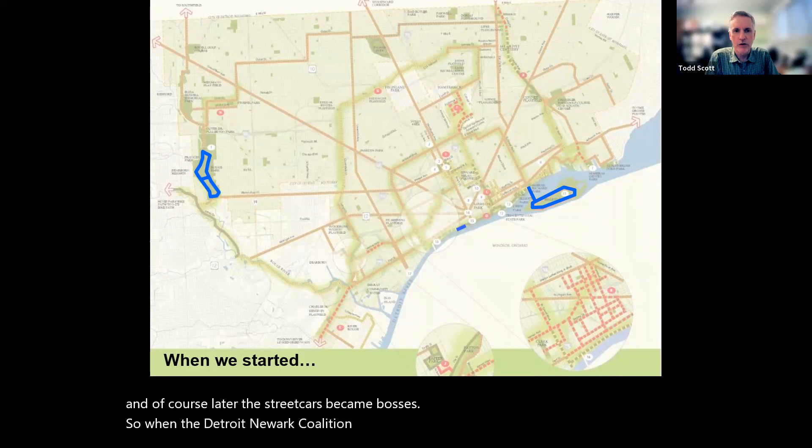So when the Detroit Greenways Coalition began, there weren't many non-motorized pathways in the city of Detroit. The roads were largely built for cars only. There were some bike lanes on Belle Isle, some trails at some of the parks, and a little bit of Detroit riverfront built down by the Joe Louis Arena. But where we are today, we're starting to see a much bigger network of biking infrastructure.

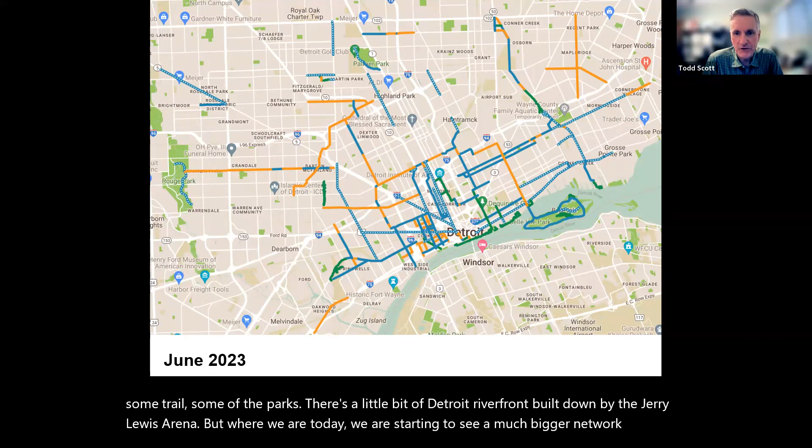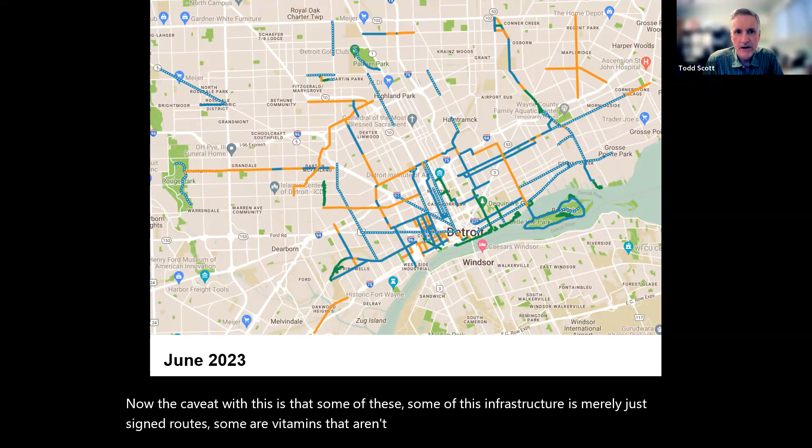Now, the caveat with this is that some of this infrastructure is merely signed routes. Some are bike lanes that aren't well maintained or separated from traffic as well as they could be. The lines with dots are protected bike lanes, but sometimes we still have cars parking in them, and they're not well maintained. So the state of Detroit bike infrastructure is ever changing, and we're constantly evolving toward better designs to address these issues.

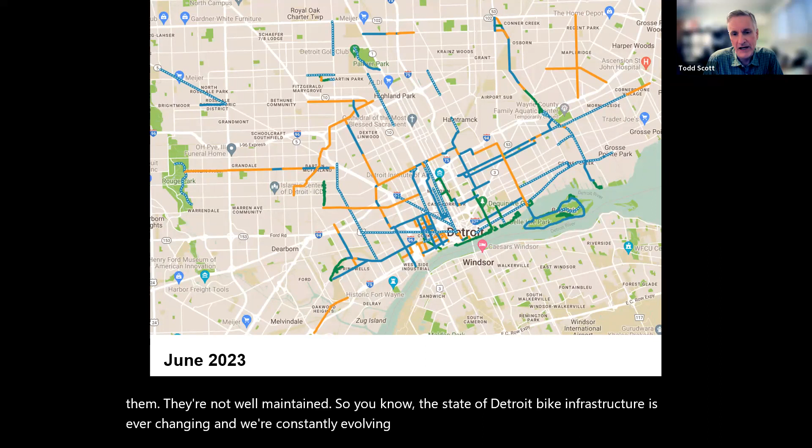Sometimes it's important just to get out there and claim your space on the road first, and then find the funding to go back and make improvements to those pathways.

The next step has been moving to protected bike lanes. These are the bike lanes on Cass Avenue. Unfortunately, they don't look as clean and as beautiful as they do in these photos—they need to be updated—but this was a major push from the city to get these put in. And now these have become kind of the standard for all projects in the city.

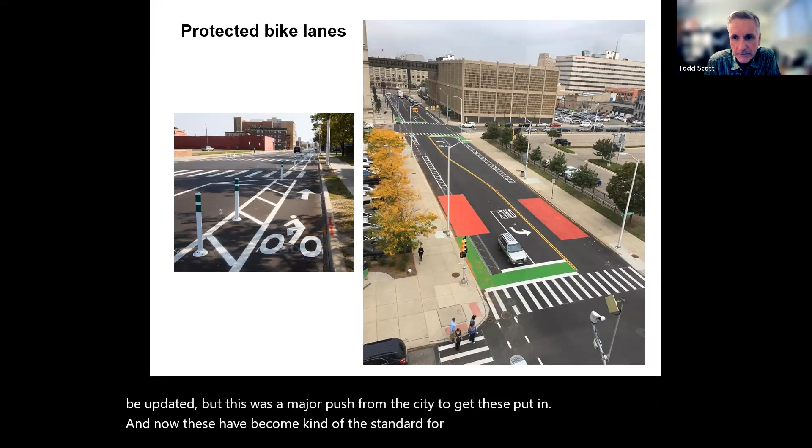One reason we've been successful in advocating for these is that we've taken a data-driven approach, and Mayor Duggan is very much into data. He doesn't want to hear the emotional arguments of why these bike lanes are beneficial or why they're killing the city of Detroit. He wants to see the data.

So in this example I'm showing here, bike lanes got put in on Jefferson. We have some bike counters—I installed them in the bike lanes, both on the far east side and also near Belle Isle. We counted 154 bikes per day just weeks after the bike lanes were installed, and closer to Belle Isle we counted 373 bikes per day. So we gave this information to the mayor, and it shows that people are using them. If you build it, they will use it.

It also shows that when people like Keith Crain from Crain's Detroit publish an op-ed saying no one's using the bike lanes, the mayor can say, you're wrong, and these are actually the numbers we're seeing. So that really helps state the case for these bike lanes.

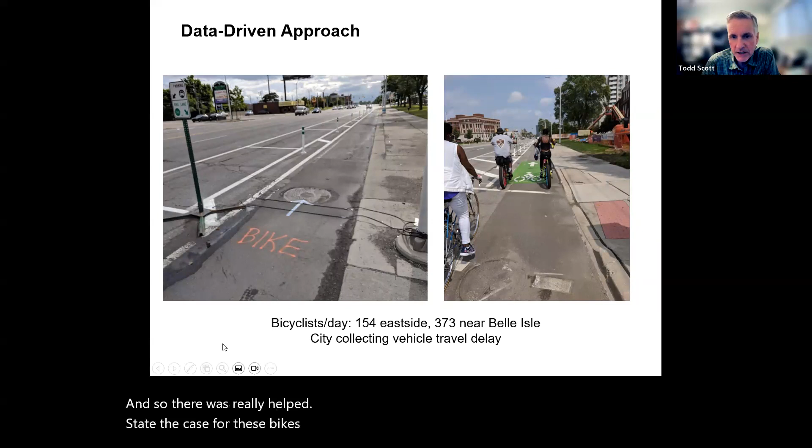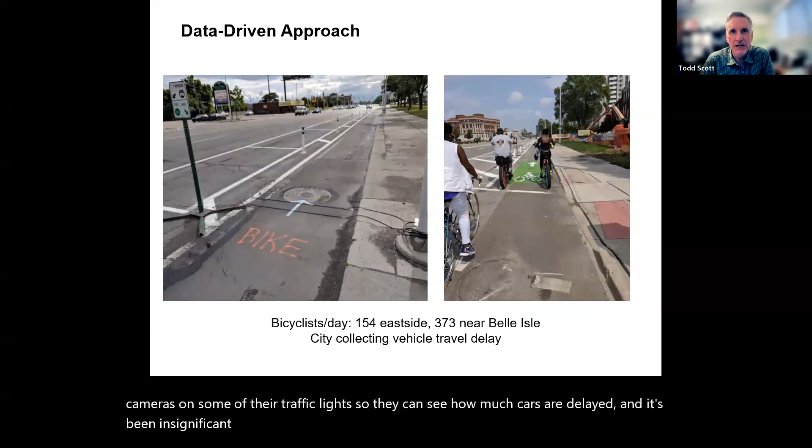The city's also collecting vehicle delay data. They have cameras on some of their traffic lights so they can see how much cars are delayed, and it's been insignificant. But motorist perception is that it's causing a major issue. The underlying issue is that for 100 years they've had their way, and now they're not, and they're unable to speed as much when the lanes are taken away like this, which causes them to be frustrated. But the data shows that this is actually a benefit.

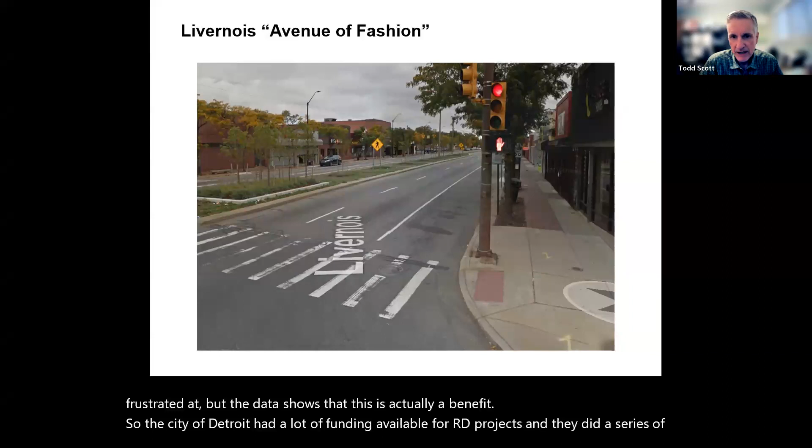So the city of Detroit had a lot of funding available for road projects, and they did a series of streetscapes around the city. Perhaps the one that was most successful was Livernois, Avenue of Fashion, between 7 Mile and 8 Mile. This is how it looked before, pre-COVID. You can see how narrow those sidewalks are—that is not a sidewalk you want to be on during the pandemic—and there was no opportunity for outdoor sales or outdoor cafes.

Besides, the average speed on the street was 40 miles per hour. The speed limit was only 30, and there were cars going substantially higher, 60 and 70 miles per hour. It's just not a street where you would want to hang out.

With the streetscape project, the road was substantially narrowed. The sidewalks were widened so businesses could expand a bit and have more of an outdoor presence. We had bike lanes at sidewalk level, which, although there were more conflicts perhaps with pedestrians, reduced the need for maintenance. Road debris no longer collected in the bike lanes with this design.

We also had MoGo public bike share expand into this area, as well as some southeast Oakland County communities, which you can think of as transit for the first and last mile of public transit. You can get off the bus, grab one of these bikes, and get to your final destination. It's been beneficial for MoGo to expand into these areas and offer reduced rates for those on state assistance, which helps make it easier for everyone in Detroit to get a bike.

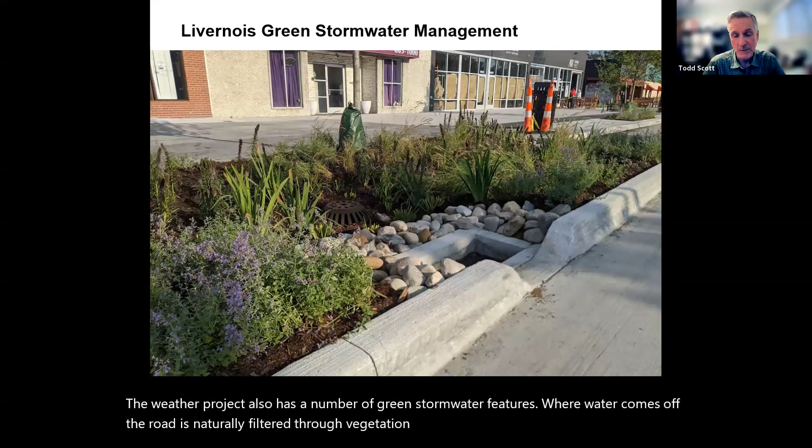The streetscape project also has a number of green stormwater features, where water coming off the road is naturally filtered through vegetation. In case of substantial rain downfall, the water goes into the sewage system, but otherwise, for lighter rain, it just gets collected in these green stormwater features.

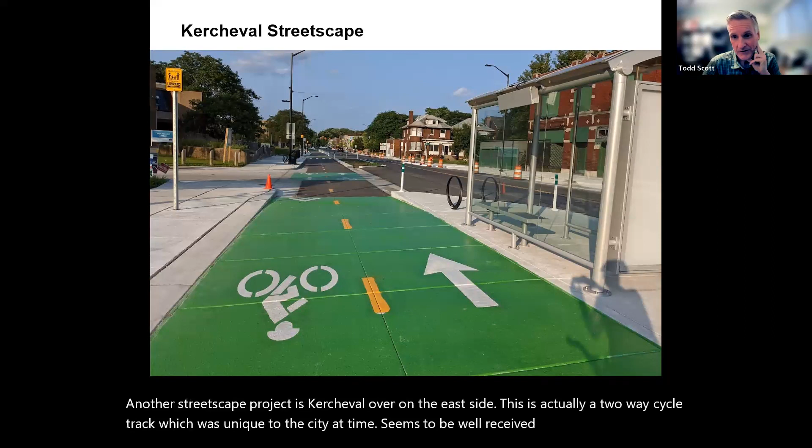Another streetscape project is Kercheval on the east side. This is actually a two-way cycle track, which was unique to the city at the time. It seems to be well received, and folks tend to like it. It has what's called a floating bus stop, where the bus stop is moved closer to the street where the buses would be, so buses don't have to pull into the bike lanes.

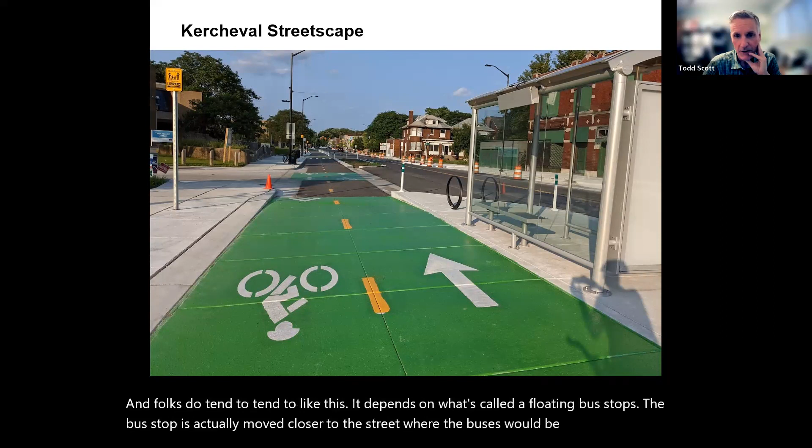This is a design that a lot of people really seem to like. There's also maybe less debris, or at least more opportunity for bicycles to go around debris if it's at the curb. West McNichols has a similar design.

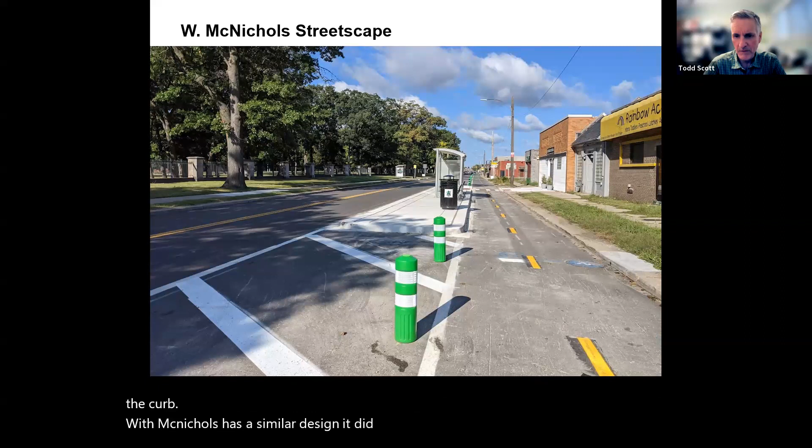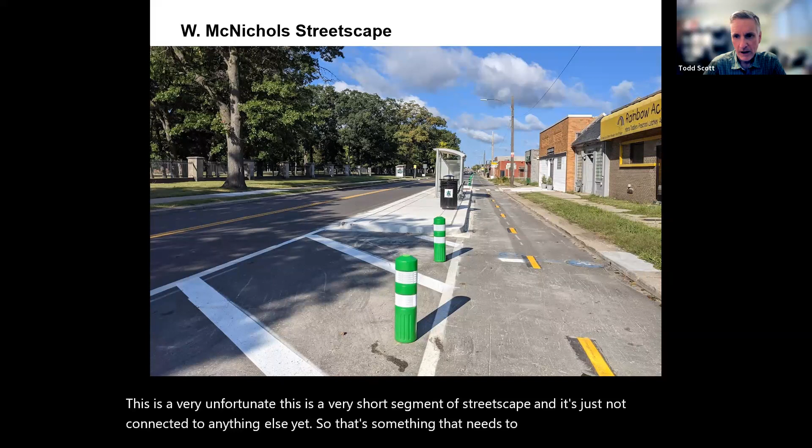It did pilot these new green delineators, which are plastic and don't look as nice as they do in this photo. Unfortunately, this is a very short segment of streetscape, and it's just not connected to anything else yet, so that's something that needs to happen. Without being connected to other things, you don't get as much ridership as you'd like.

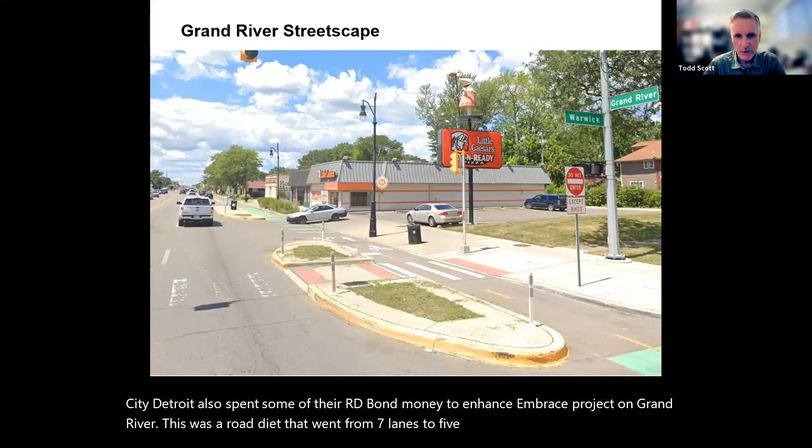The City of Detroit also spent some of their road bond money to enhance MDOT's project on Grand River. This was a road diet that went from 7 lanes to 5 with a two-way cycle track. It did lose some parking, so it was a little bit controversial, but they lost parking on the side of the street where it wasn't needed as much. There are still issues with cars parking in the bike lane, and it's been difficult to stop that from happening.

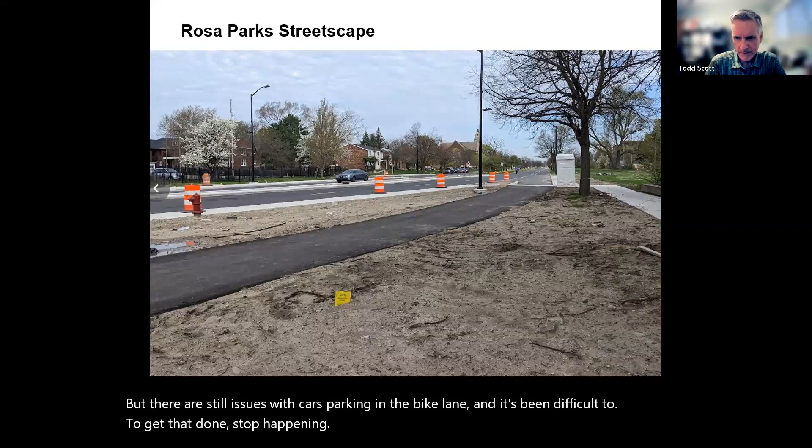Another streetscape still under construction is Rosa Parks. There used to be 5 or 6 lanes one way going northbound - substantially more lanes than the Lodge Expressway, which was ridiculous. Detroit has reduced those lanes, removed pavement, which is a great way to reduce stormwater runoff, and added that space, which used to be car lanes, to the nearby park to expand it, along with a pathway for bicyclists to travel through the park and connect up with the new bike lanes on the north side.

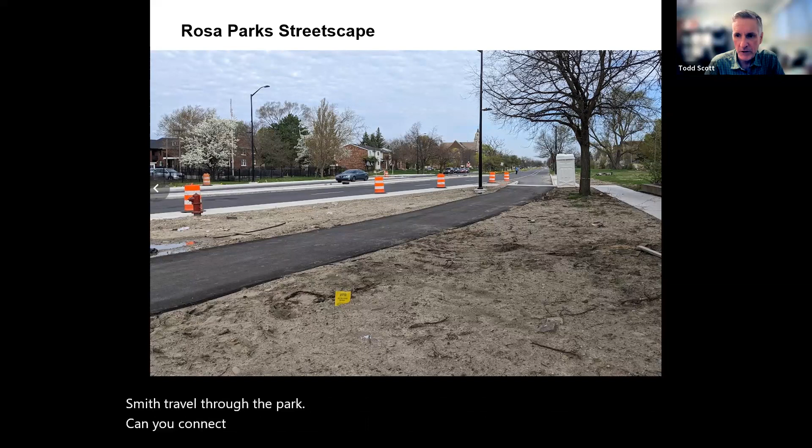East Warren streetscape is also getting enhanced protected bike lanes. This is a picture from last year - it's further along than this now.

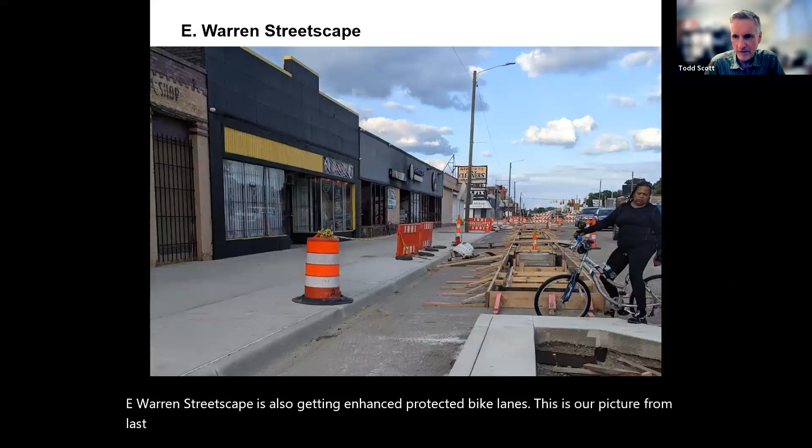And this is the Dexter streetscape, which I'm not sure will start construction this year. I believe it will start this year, but I don't think the contracts have gone before City Council yet.

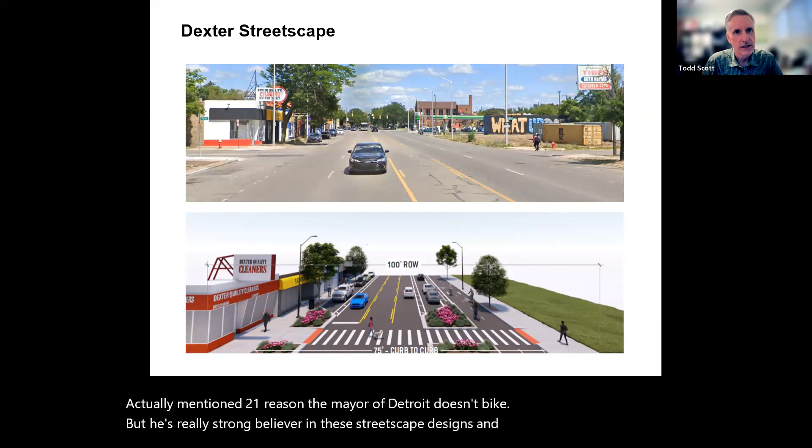I should mention too - one reason the mayor of Detroit doesn't bike, but he's really a strong believer in these streetscape designs, is that the former transportation commissioner for New York City, Janette Sadik-Khan, once gave a presentation to the mayor.

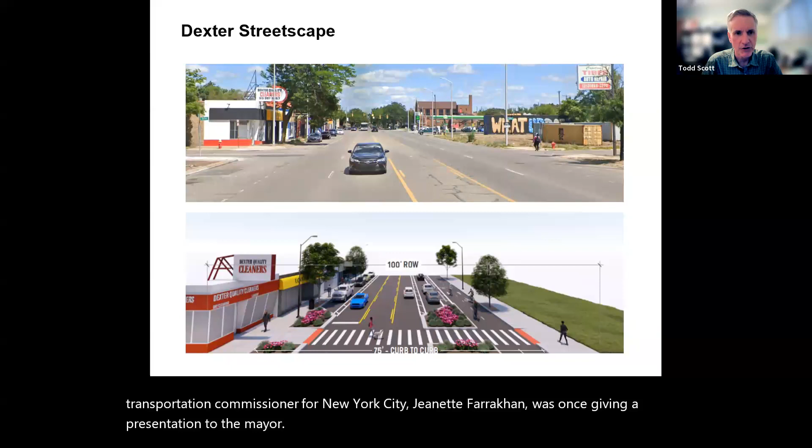She was part of Bloomberg Associates and gave a presentation on her work in New York City adding protected bike lanes and road diets, among other projects.

Immediately into her presentation, the mayor stopped her and said, 'I was just in New York City. I walk out of my hotel. You took away a lane of traffic to add bike lanes and the cars were backed up. Why did you do that?'

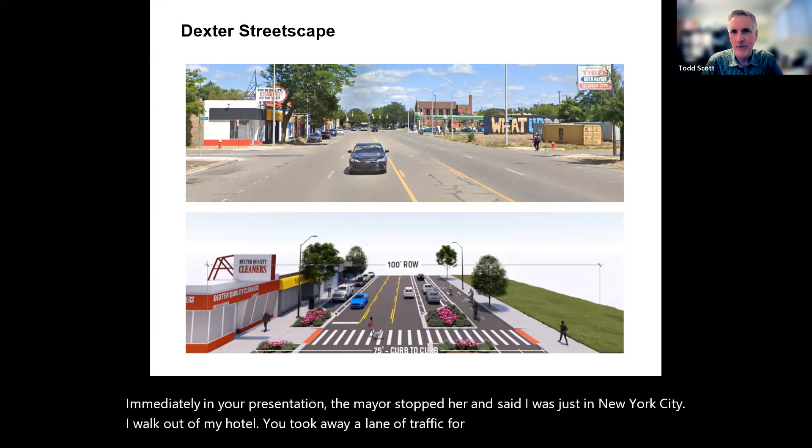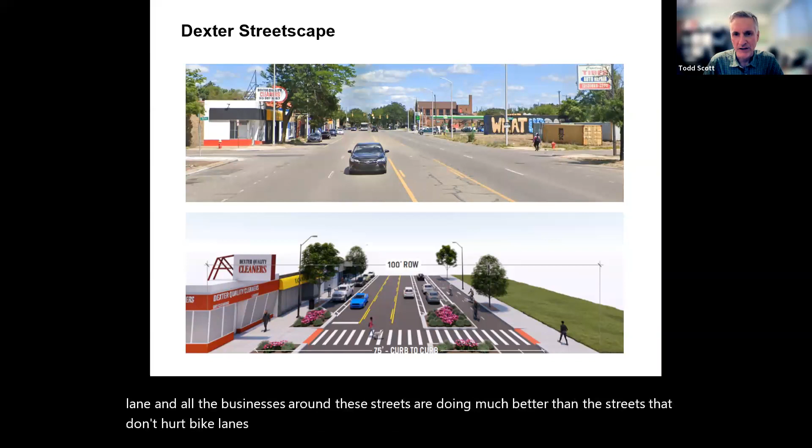She was able to present the data. She said, 'Well, actually the cars are moving a little bit better than they were before, and we have all these bicyclists using it,' giving numbers on bicyclist usage of the bike lane. She also showed that businesses along these streets are doing much better than streets without bike lanes and complete street designs. That really helped sell the mayor on this whole concept moving forward.

So I want to talk a little about what's going on in the near future. The city of Detroit completed a new transportation plan looking at all modes of transportation, not just cars, which was just recently released. They also did a street design guide as part of this, saying if you have this type of street, here's how it should look in the future.

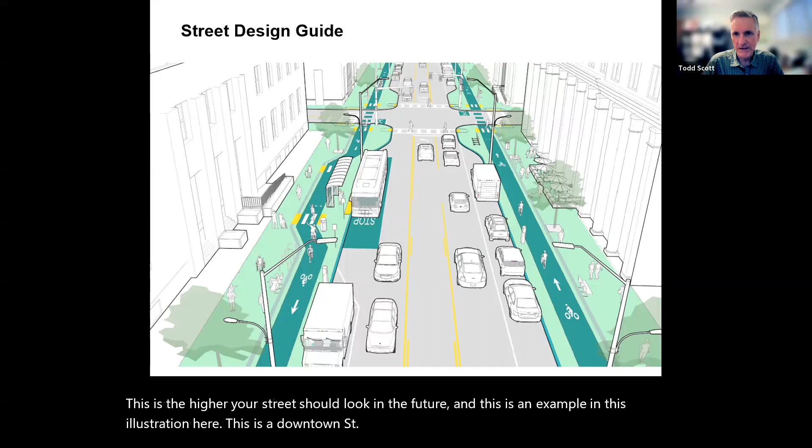This is an example in this illustration. This is a downtown street, and the expectation is that your downtown street should look similar to what was done on Livernois. And then this is a residential street.

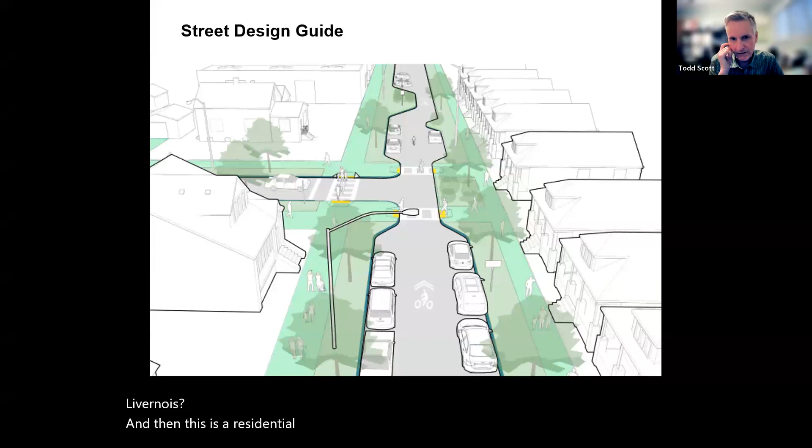You've probably heard about Detroit installing speed humps to slow speeding cars, but this is another approach to reduce speeding: narrowing the street and adding bump outs and chicanes, because you're not going to go super fast on a street like this. That just increases the safety for everyone.

A third part of the transportation plan was to develop a comprehensive safety plan. Detroit has a very high crash rate. We lose over 100 people per year in vehicle crashes, including over 40 pedestrians per year. Not too many bicyclists, fortunately.

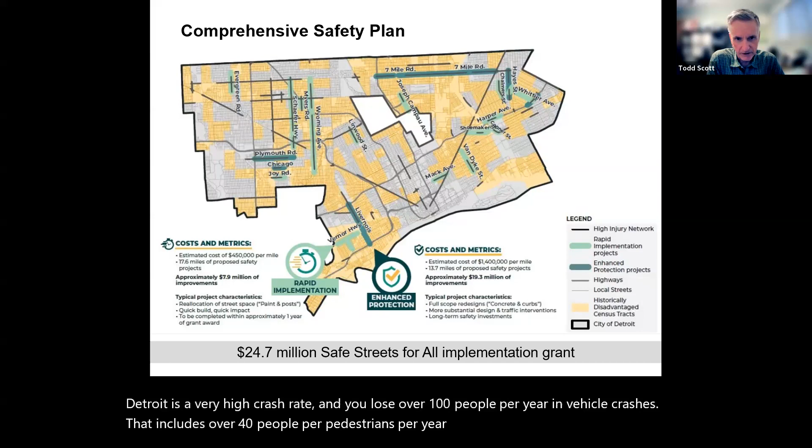But those crashes aren't distributed evenly across the city of Detroit. They tend to occur on certain roads. So the city analyzed all the roads and where crashes are occurring, then set out target improvements to the roads with the most crashes. It's called the high injury network.

With this completed, they were able to apply for a federal grant to help build out these projects, and they received nearly $25 million from the U.S. Department of Transportation. Some projects are really quick, just paint and post, but some are much more substantial changes that involve moving curbs and so on. So I'm excited to see these happening in the next couple of years.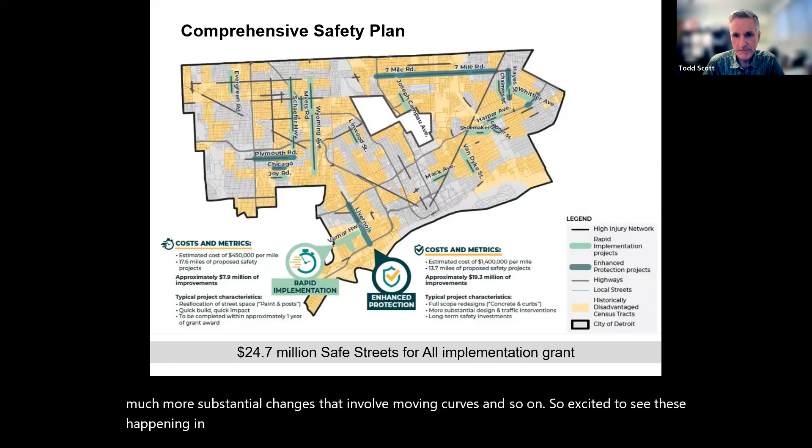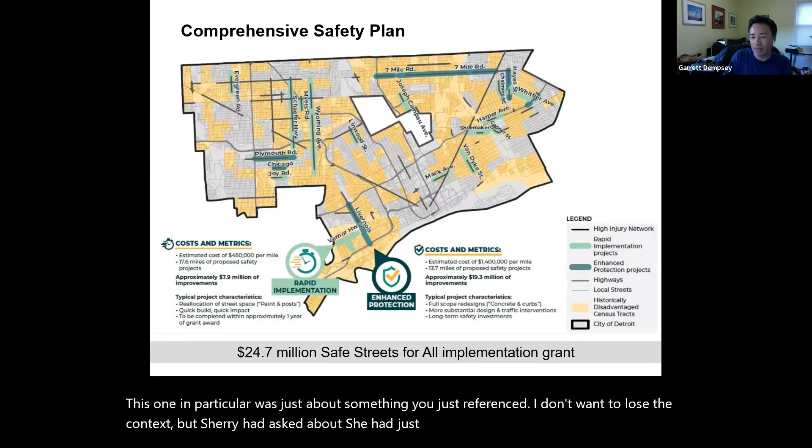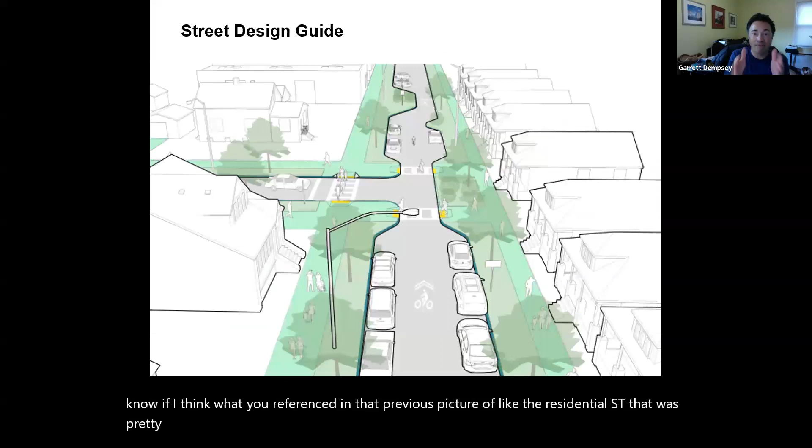Nope, go ahead. This one in particular was about something you just referenced. Sherry had commented that she hears a lot of complaints about speed humps collecting rainwater and debris, and she's asking if the residential street you showed, which was pretty narrow without speed humps but used a different way of slowing people down, might avoid those problems.

It could, yeah, because I think anytime you do a project like this, you're going to be doing some regrading, so you can solve all your water flow issues. But when the city goes in and puts speed humps in, they're not looking at the grade of the road and making any corrections. So this kind of project would address that.

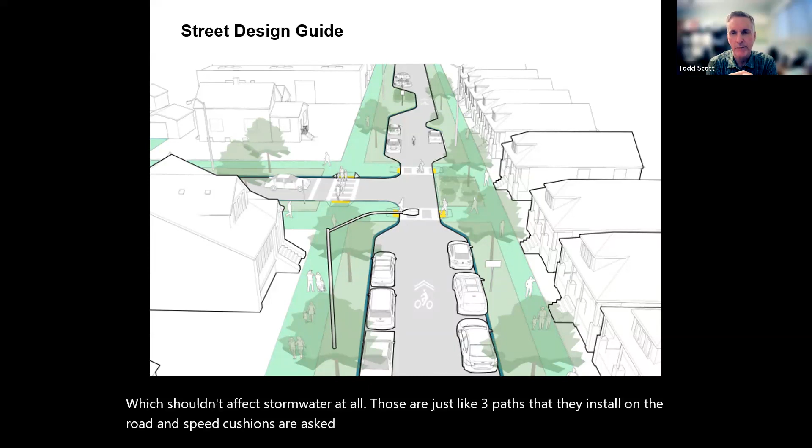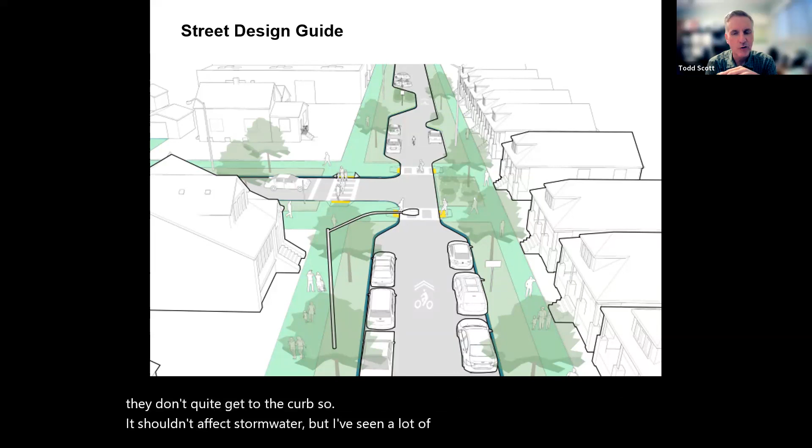But I think speed humps typically don't run all the way to the curbs. There are two types: speed cushions, which shouldn't affect stormwater at all since they're just like three pads installed on the road, and speed humps, which are asphalt running almost all the way across the road but don't quite reach the curb, so they shouldn't affect stormwater either. But I've seen a lot of road designs where the grade of the road is incorrect, and that is a big issue.

Thanks, Todd. So talking about some other projects that are occurring that are interesting, related to non-motorized. One is the replacement of I-375.

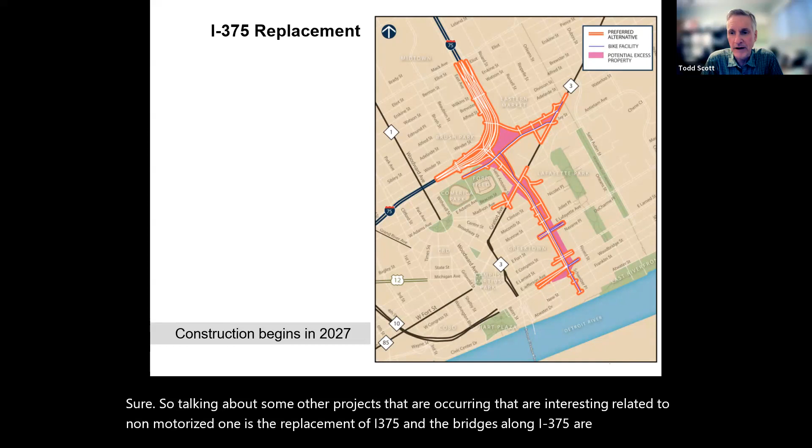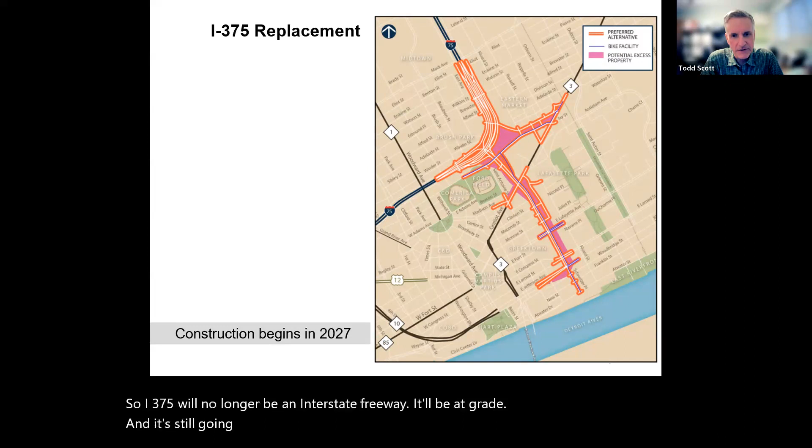The bridges along I-375 are near the end of their lifespan, so MDOT had to do something. They could rebuild everything as is, or they could imagine it as an at-grade boulevard, which is what they pursued. So I-375 will no longer be an interstate freeway, it'll be at grade. It's still going to be wide, still designed to carry a lot of traffic, unfortunately. But there are some positives to it.

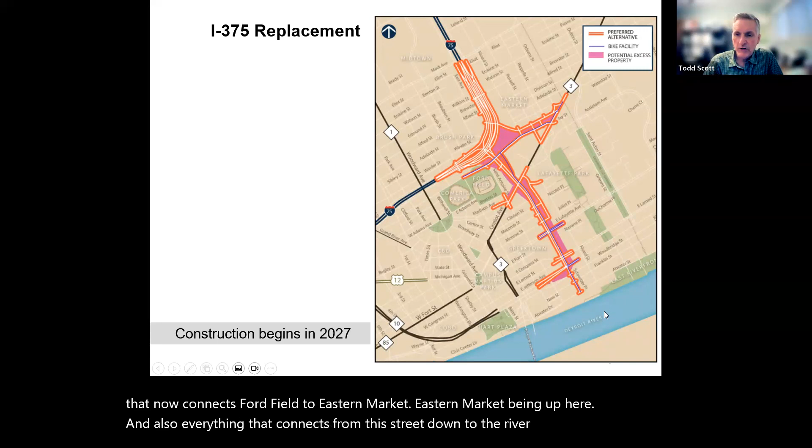It's hard to see on this map, but that blue line is new bike lanes. There will be a bike lane that now connects Ford Field to Eastern Market up here, and also a bike lane that connects from this street down to the Riverwalk. That's super exciting, those are really important connections that don't currently exist.

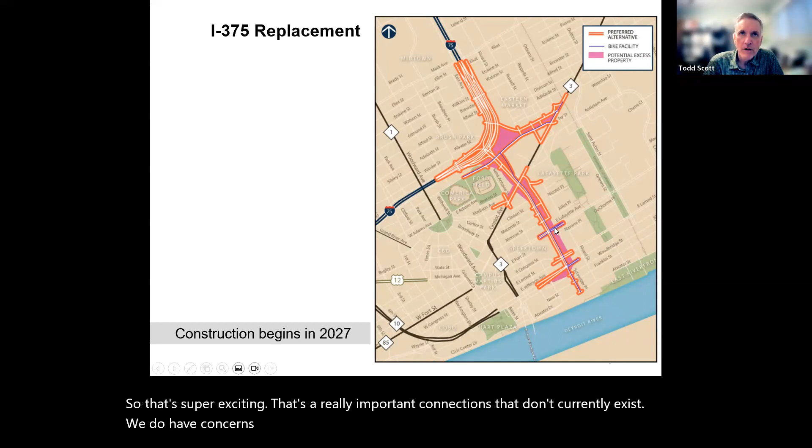We do have concerns about people getting across this new boulevard, which can get pretty wide, especially up near Gratiot. It's quite wide, it gets much narrower the further south you go, but we're really concerned about how pedestrians and bikes can get across this safely, and that's something we're continuing to work on with the city of Detroit and the Michigan Department of Transportation.

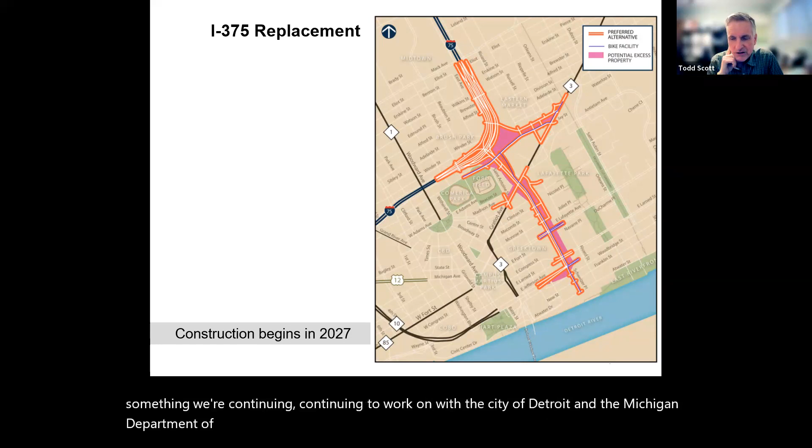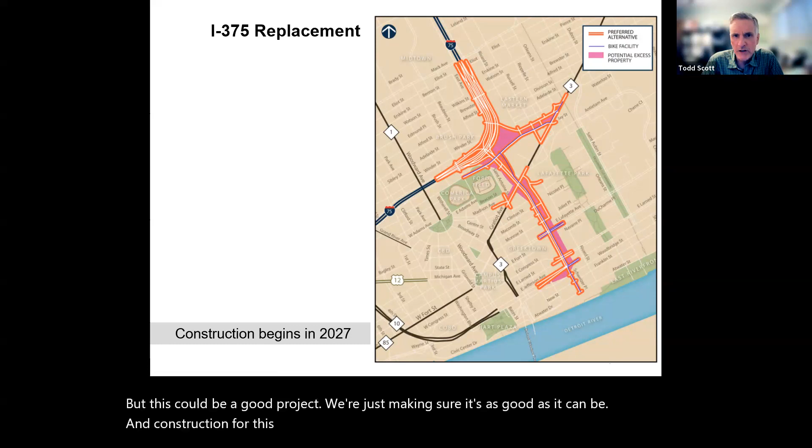But this could be a good project, we're just making sure it's as good as it can be. Construction for this begins in 2027. MDOT received a substantial grant from the U.S. Department of Transportation. One other big issue that we're working on, which is affecting Detroiters, is pedestrian bridges.

MDOT has done a very poor job maintaining their pedestrian bridges over their freeways. They don't maintain them, and then they become blighted and decay, and then MDOT closes them, and in many cases quietly just removes them to save money. They've done this quite a bit in the past, and we've been stepping up lately to prevent this from happening any further.

One thing that happened last year that really brought this to the limelight was a pedestrian was walking across a bridge over the Lodge and actually fell through the bridge. The bridge opened up underneath him and he fell. Fortunately, it was not over the car traffic underneath the bridge, it was on the grassy embankment, and he was not hurt too badly. But suddenly that caused a lot of issues.

MDOT realized they needed to start inspecting their pedestrian bridges more often. As a result, they've closed I think 3 more bridges, and they don't have plans to replace them. This is just a major issue that we're taking up. You can't expect people to walk miles out of their way to get across these freeways, which are major barriers. So this is something to stay tuned on.

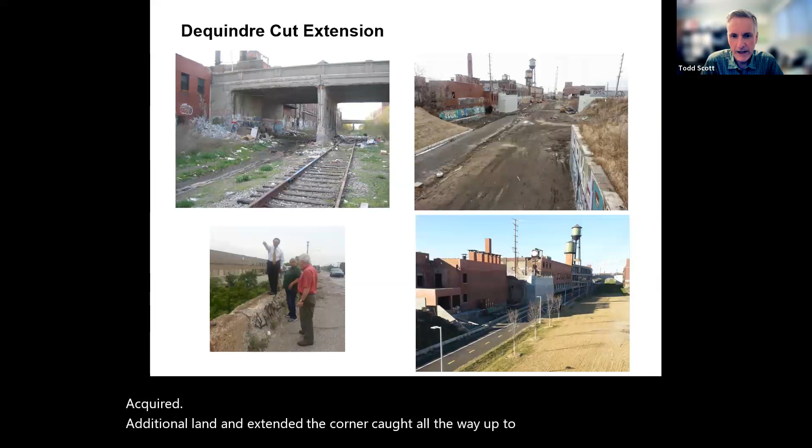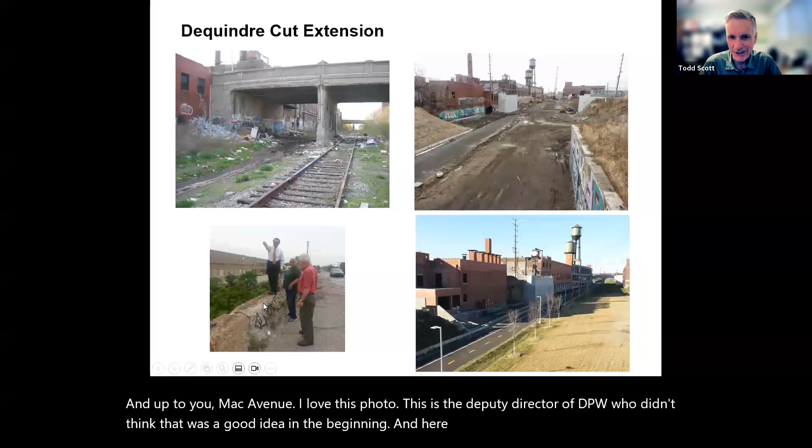So the city of Detroit acquired additional land and extended the Dequindre Cut all the way up to Eastern Market and up to Mack Avenue. I love this photo. This is the deputy director of DPW who didn't think the Dequindre Cut was a good idea in the beginning. Here he is standing precariously on a crumbling bridge, telling the MDOT person why we need funding to continue extending the Dequindre Cut trail. Of course, this is what it looks like today. Highly successful project.

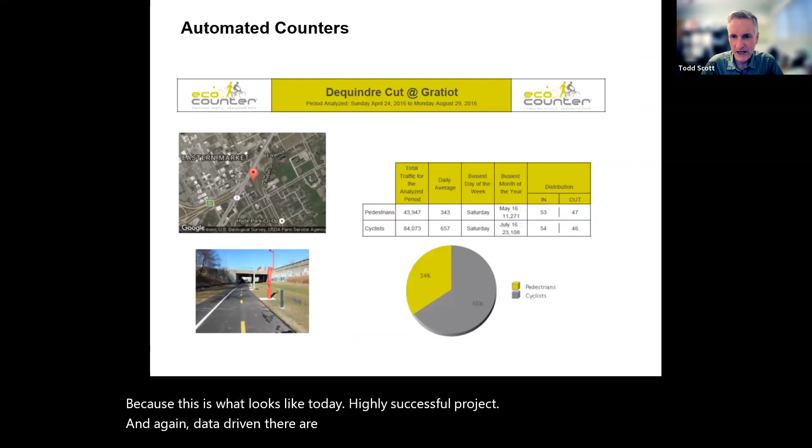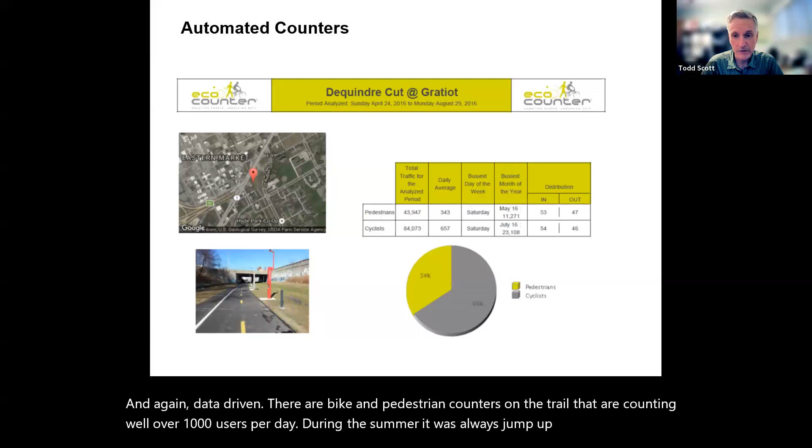Again, data driven. There are bike and pedestrian counters on the trail counting well over 1,000 users per day during the summer. We saw this jump up significantly during COVID too. Use of the trails went through the roof, which justified getting more ARPA, American Rescue Plan dollars going towards trails such as the Joe Louis Greenway.

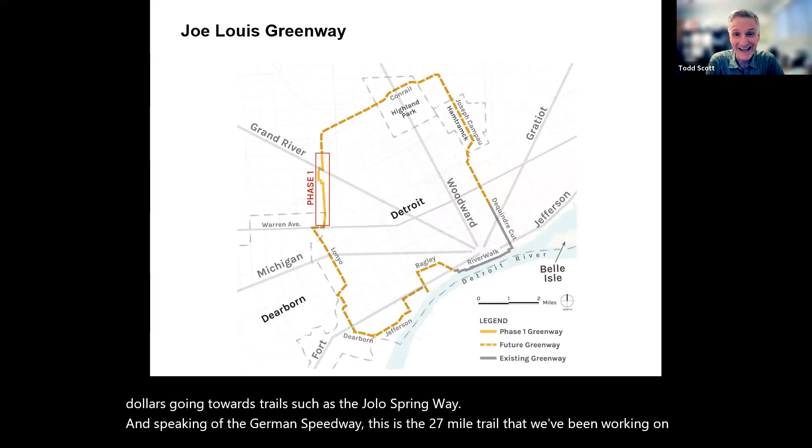Speaking of the Joe Louis Greenway, this is the 27-mile trail we've been working on since 2008. We used to be kind of the lead on this, working with the city, and now the city has totally taken this over. They are just going crazy, expanding the vision of what we thought was possible.

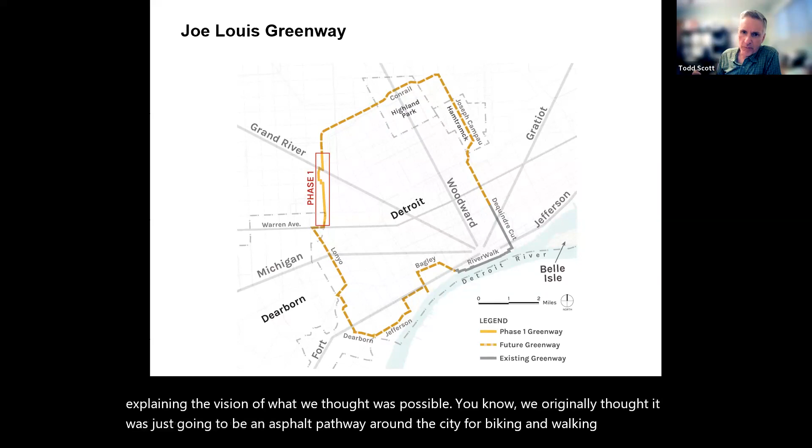We originally thought it was just going to be an asphalt pathway around the city for biking and walking. When Detroit hired Maurice Cox as its planning director, he expanded the vision to say this should be a tool for redeveloping the neighborhoods, revitalizing retail strips, connecting all the investments we were making in the neighborhoods, as well as being a great recreational amenity for Detroiters.

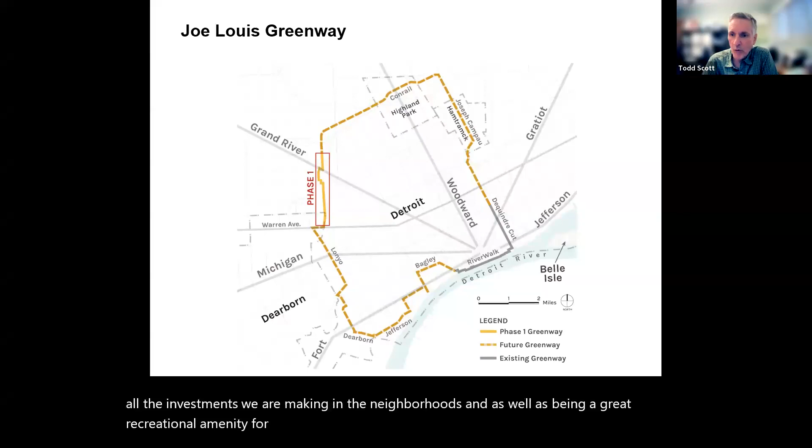So we walk around the loop here. The Dequindre Cut, of course, is already done. Riverwalk is done. The Southwest Greenway just opened last week, so that is basically done. Bagley is done - I showed you the shared use street that is included here.

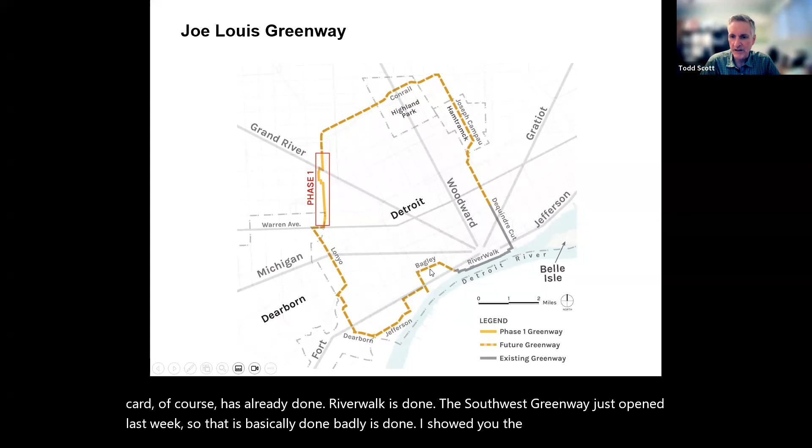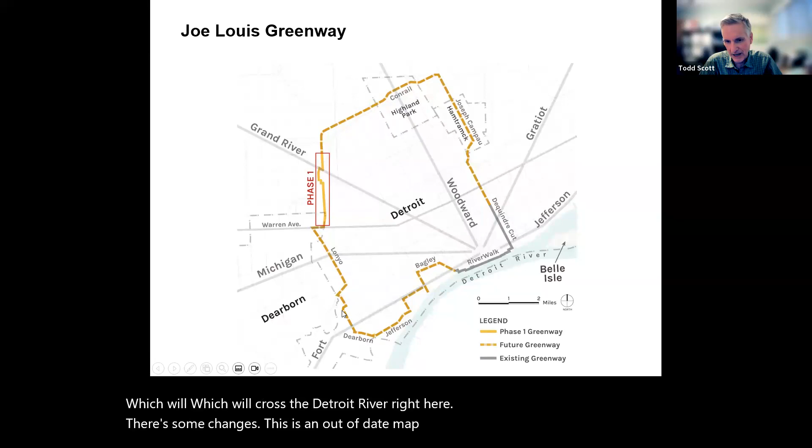There's some debate about how this route will go. It's still a little bit in limbo. But this section along Jefferson will get built as part of the Gordie Howe Bridge, which will cross the Detroit River right here. There's some changes - this is an out-of-date map. Some changes are happening in this area with some of the routing based upon community feedback.

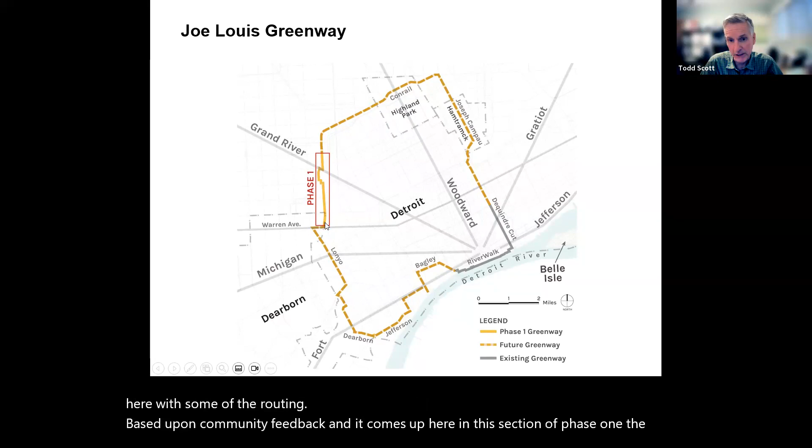And then it comes up here in this section of phase one. The lower half is almost completed - it will be completed this year. The pathway's in, there's just some landscaping to complete, and a new park went in at Warren Avenue with a new play feature. The construction continues northward across Grand River, where there's a retail strip that'll get revitalized.

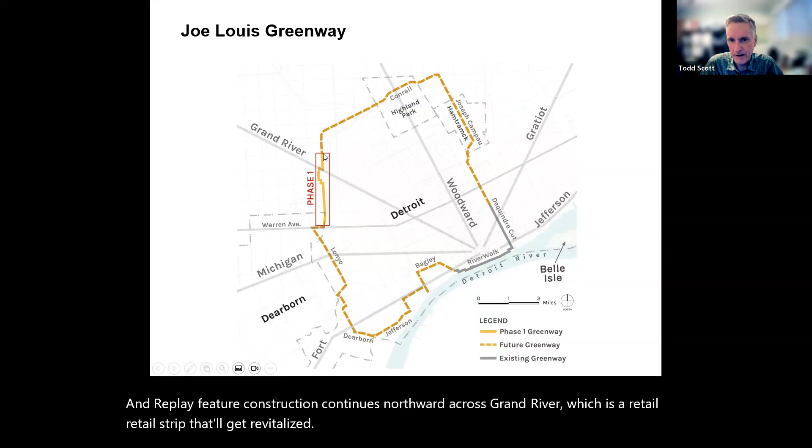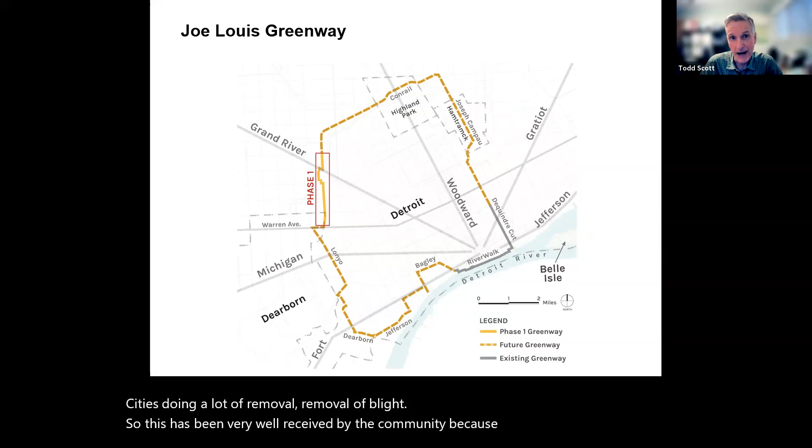The city is doing a lot of removal of blight. This is being very well received by the community because while adding a bike path was not at the top of their priorities, removing blight, adding park space, improving retail - all that was at the top of their list. So this greenway is absorbing all the priorities of the community and becoming much more than just a pathway for walking and biking.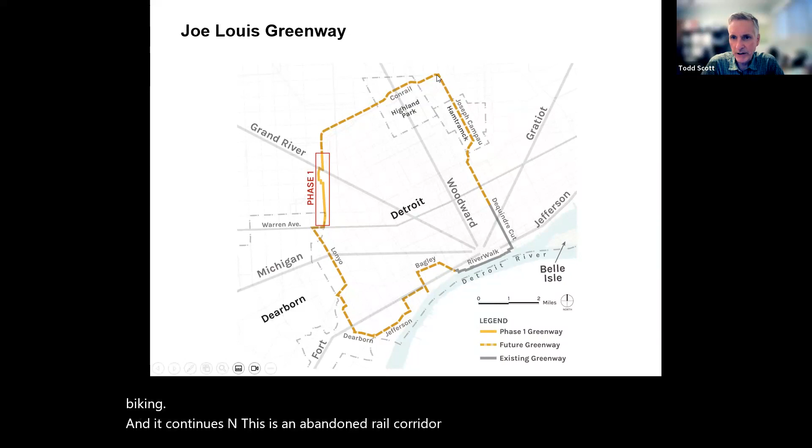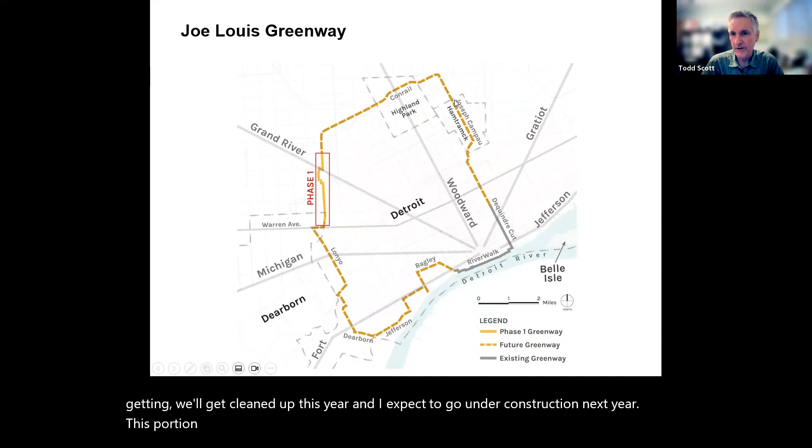It continues north. This is an abandoned rail corridor that was owned by Conrail. This will get cleaned up this year, and I expect it to go under construction next year. This portion of Joseph Campau already has a two-way cycle track on it. Hamtramck is completing their section this year.

They couldn't go right through downtown Hamtramck. It was too narrow, so there's going to be an alternative route for less confident cyclists to go through the alleyway, and they're working with businesses to open up their access to the alleyway. So that's going to be a really unique, fun feature.

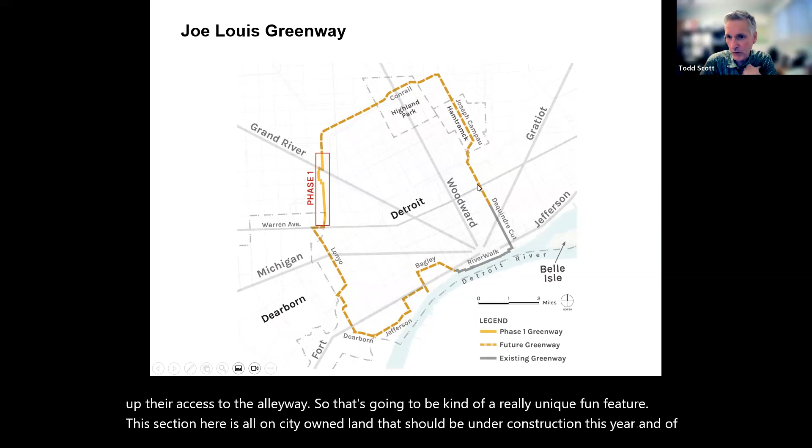This section here is all on city-owned land. That should be under construction this year. And of course, an extension of the DeQuindre Cut along the rail corridor. This will be under construction soon as well.

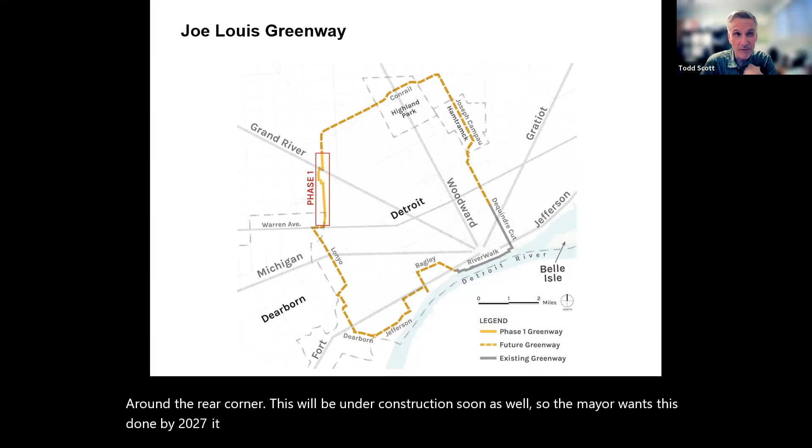So the mayor wants this done by 2027. When we started it, it was a $35 million project. Now it's like a $350 million project or something like that. Or maybe it's $250 million.

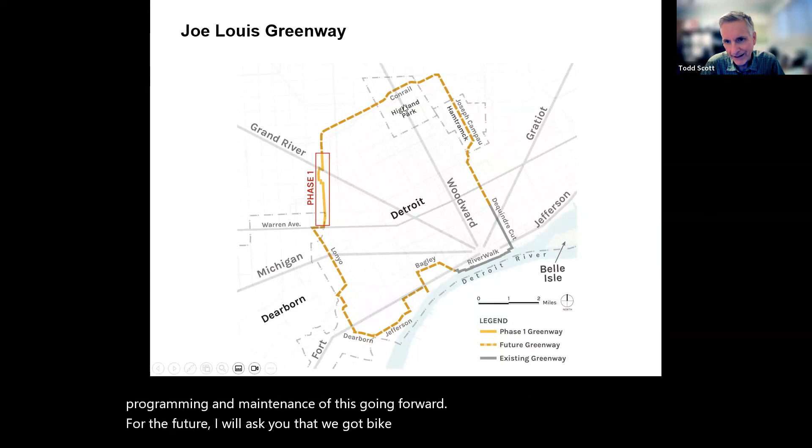The city has almost all the money, but a Joe Louis Greenway Conservancy was created to take additional funding to create an endowment, and you can take the interest off that endowment to fund programming and maintenance going forward. I would add too that we got bike lanes installed on Highland Park on Hamilton, and we're hoping, they haven't been well maintained by the city of Highland Park, but we're hoping the Joe Louis Greenway will have funding to help maintain those going forward, because those bike lanes help connect the entire city of Highland Park to the trail.

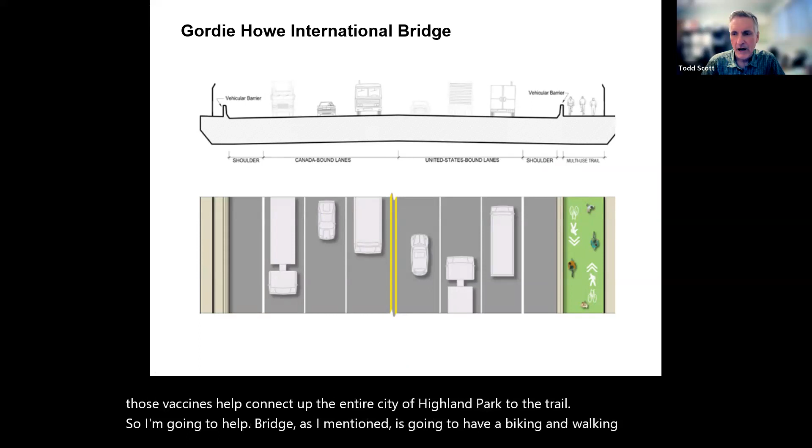So Gordie Howe Bridge, as I mentioned, is going to have a biking and walking path along its side. And Canada announced that there will be no toll for bicyclists going across between Detroit and Windsor, which is great. There's also plenty of trails on the other side, so you can go wherever you want, out to Point Pelee or Amherstburg. It's gonna be pretty amazing.

Already mentioned the Southwest Greenway that just opened. This is a former rail corridor between the Michigan Central Station and the Riverwalk.

There's a new section of Riverwalk in front of the Riverfront Apartments. I'm not sure when that will open. It'll be opening soon, but the Riverfront Conservancy is waiting for the next piece to open further downstream. And I'm not clear if that'll be opening this year or next year.

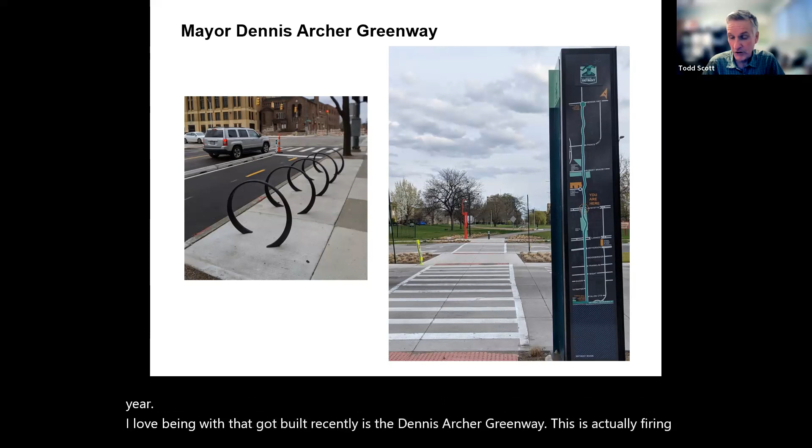Another greenway that got built recently is the Dennis Archer Greenway. This is actually following roughly where Joseph Campau Street is, and this helps connect more people to the neighborhood. There's a really great success story here between Larned and Jefferson. A bunch of businesses went in.

The East River Walk is expected to open up this year. That will connect Mount Elliott Park to Gabriel Richard Park and the MacArthur Bridge to Belle Isle. Super exciting. Folks have been waiting on this for a long, long time.

There's a new trail being built around the perimeter of Belle Isle, and that goes roughly between the road and the water. Portions built from the bridge to the yacht club. There's a gap, and it continues on to the Iron Belle trailhead. The rest of it should be under construction by the end of this year and completed next year.

Then I mentioned briefly, there are plans to build a greenway using existing infrastructure from Lake Huron all the way to Lake Erie. This is being led by the Community Foundation for Southeast Michigan, but this is a long-term plan for connecting up that entire region.

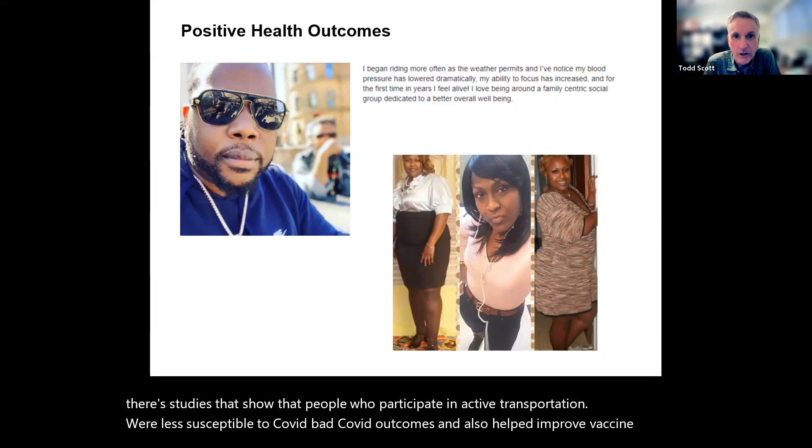There are studies that show that people who participate in active transportation were less susceptible to bad COVID outcomes, and it also helped improve vaccine outcomes as well. So there's just a lot of positives to getting more people biking in terms of health and also the health of our planet.

Some might see this as a big pivot for us getting into climate change, but it really isn't. We really see this as an opportunity to get more funding and more done for getting people biking and walking and other green modes of transportation, as well as dealing with stormwater runoff and reducing urban heat islands.

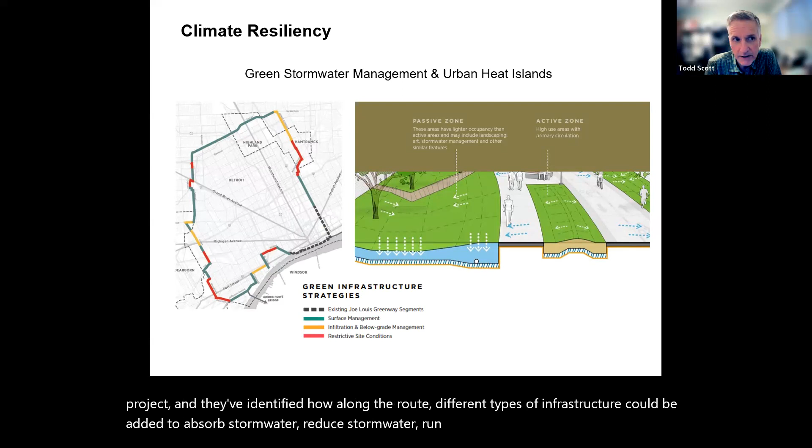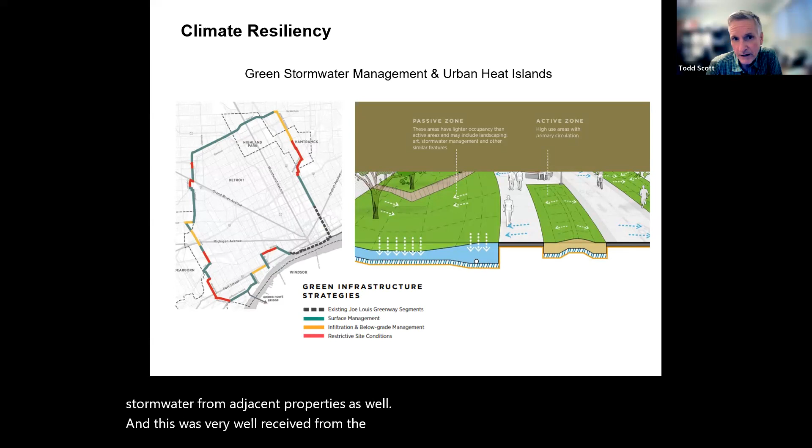In fact, this is the plan for the Joe Louis Greenway. Green infrastructure is key to this entire project, and they've identified how along the route different types of infrastructure could be added to absorb stormwater, reduce stormwater runoff, even take on green stormwater from adjacent properties. This was very well received from the community. And of course, Sierra Club's Erma Leaphart was a big part of this as well, always pushing for green stormwater management. So I'm glad to say it was a big part of this Greenway project.

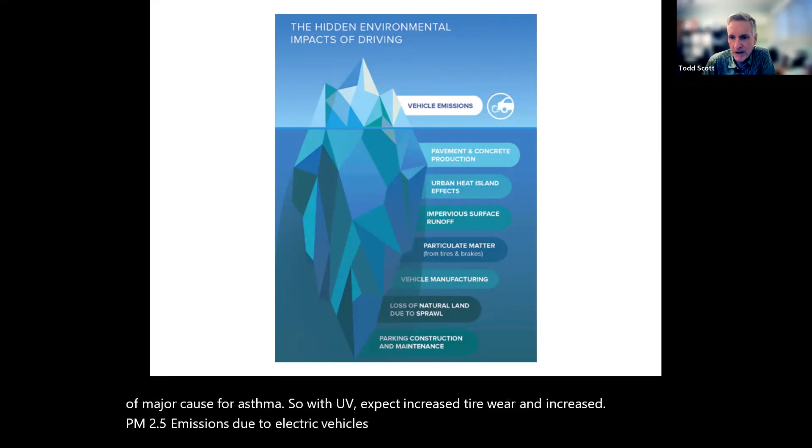So with EVs, expect increased tire wear and increased PM 2.5 emissions due to electric vehicles. And as mentioned, vehicle manufacturing, sprawl, and also parking your vehicle all have environmental costs associated with them. So what we really need to do is reduce our vehicle miles traveled by shifting people to different modes that are more green.

We really need to invest more in transit so people don't have to take cars. You can get places by rail much easier, not just across the state, but also within the city of Detroit. Our transit is not what it needs to be.

E-bikes are a great opportunity to get more people using bikes as transportation because it doesn't require the level of fitness. You can get places without sweating. You can travel longer distances faster, and you can use existing infrastructure, and we don't need any changes to current laws. It is ideal. I know Sierra Club has come out in strong support of getting more people on e-bikes.

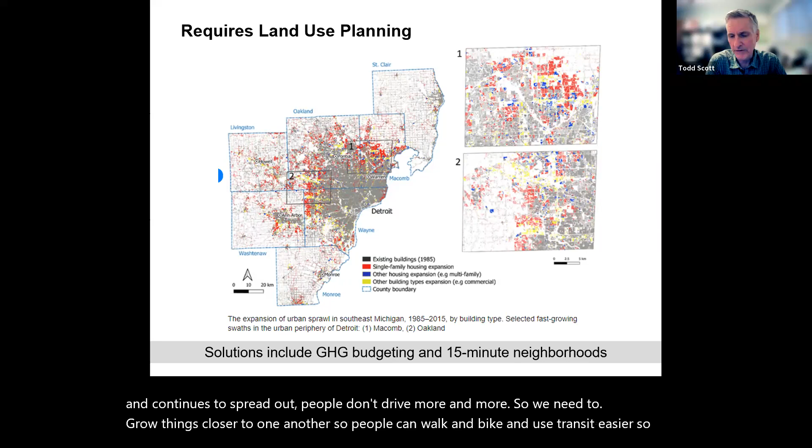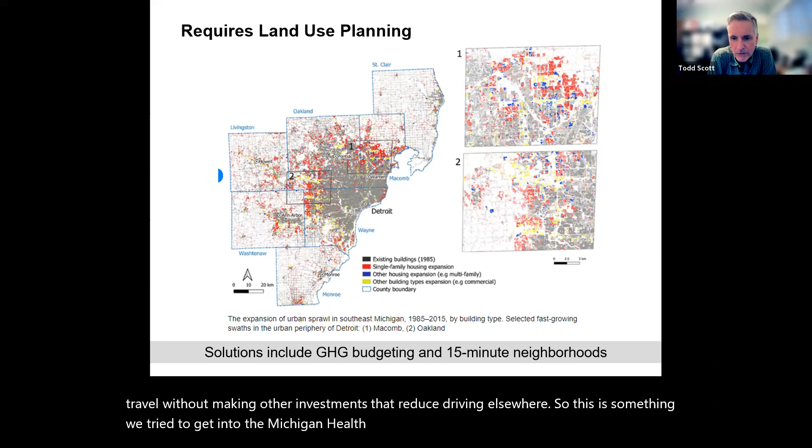States like Colorado are doing what's called greenhouse gas budgeting, so their road agencies can't just build new roads or widen roads, which induces more travel, without making other investments that reduce driving elsewhere. This is something we tried to get into the Michigan Healthy Climate Plan, but MDOT refused to allow it.

One of the issues is if you don't tackle land use policy, even though you're reducing emissions, people are going to drive more, and that will eliminate all the benefits you got from reducing emissions. Every time you widen roads, you increase vehicle miles traveled by the same proportion. One study found that a 10% increase in lane miles results in a 10% increase in driving. So it's just not a solution.

Unfortunately, this administration does not understand that. They are unwilling to change MDOT. The lieutenant governor told me that changing MDOT is a very difficult task, and I said, yes, they work for you, so start. But they're unwilling so far to change MDOT, and MDOT loves increasing vehicle miles traveled because that increases gas tax funding to them.

Fixing the damn roads needs to be more than just filling potholes. We need to look at doing road diets, doing stormwater management, shifting people to safer, greener modes of transportation like biking, walking, and transit.